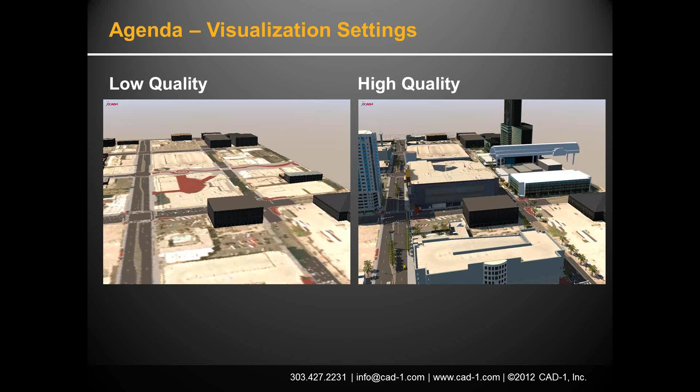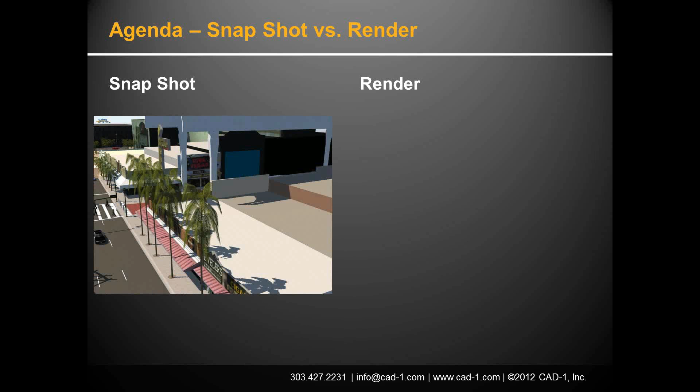When you're taking pictures, you can either do a snapshot or a render. A snapshot is basically a screen capture of what the screen looks like, so you go in there and take a snapshot and get pretty much exactly what's on the screen. A render will actually go in there and render the scene. If you look at the shadows of the palm trees, the palm trees themselves, or the road, you can see the materials in more detail. So you can go in and render the scene.

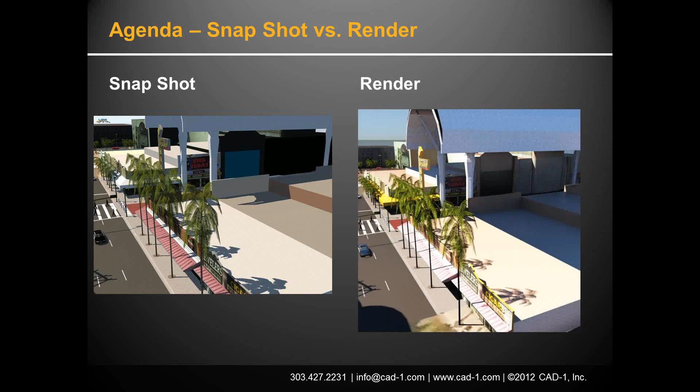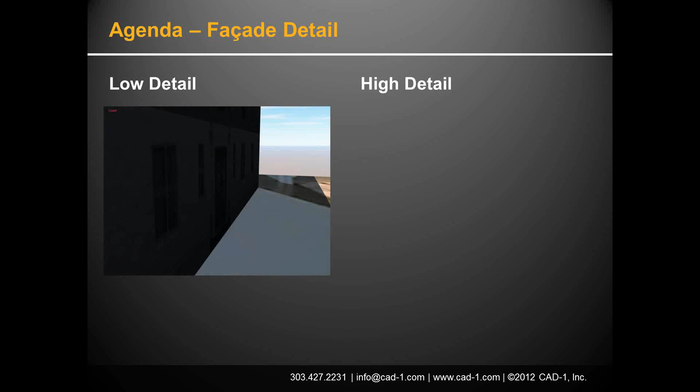All right, you've got the facades. The buildings have a facade, and you can change the details of those as well. So we've got, again, a low detail and a high detail on the facade. This is going to be the exact same picture. Over here on the left, the detail is set to low - you know, I want to be able to move around quick, I don't want to take those resources to calculate all the different parts of the facade. Over here on the right is the exact same facade with the detail set to high. So you can see there's a huge difference.

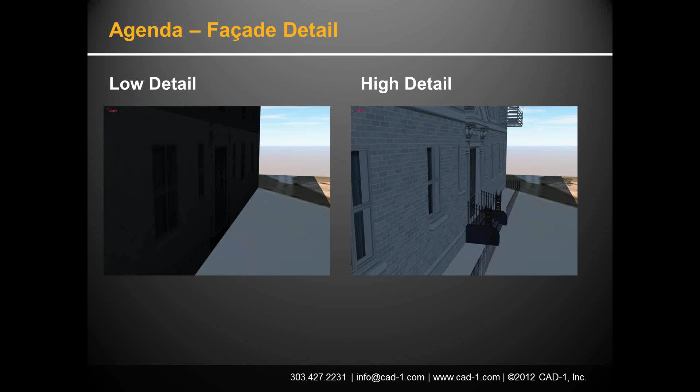I just want to see a picture of the side of it, or I actually want to see it as a 3D model - I want to see the steps, I want to see the fire escape. If you look in the shadow over there on the far right-hand side, you can actually see the shadow of the fire escape on the ground.

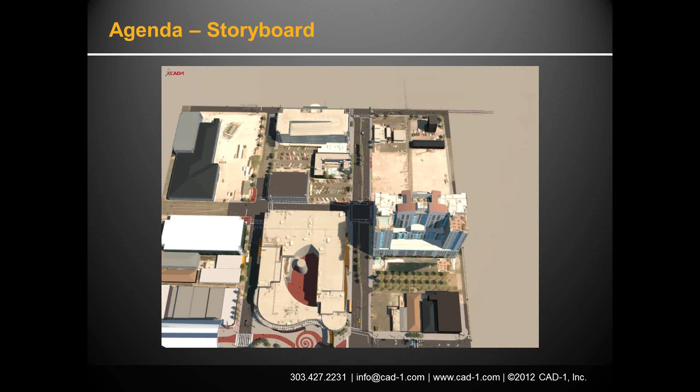And then we can also get in and start doing some animations or some visualizations with the storyboards, so you can go in and create videos. Now, I'm not the best - I'm an engineer, so I don't have a real good eye for visualization and what makes a video look good. But this is an example of the tools. It's going through the web interface, so it's not quite as smooth as what I'm seeing on my system, but it gives you an idea of what you can do with the visualization tools.

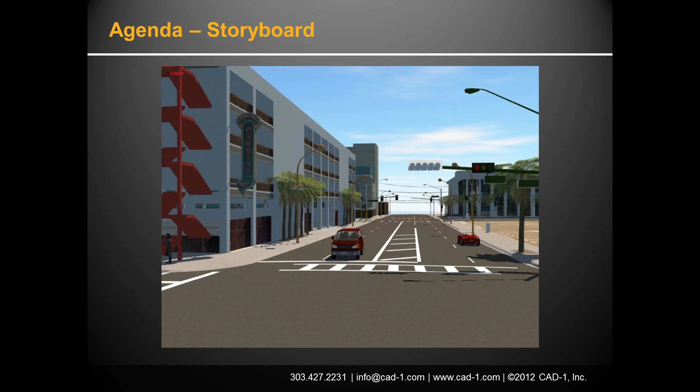All right, so we can see how to create a video, something along these lines. I know I've got a great idea. Let's just get to it, shall we?

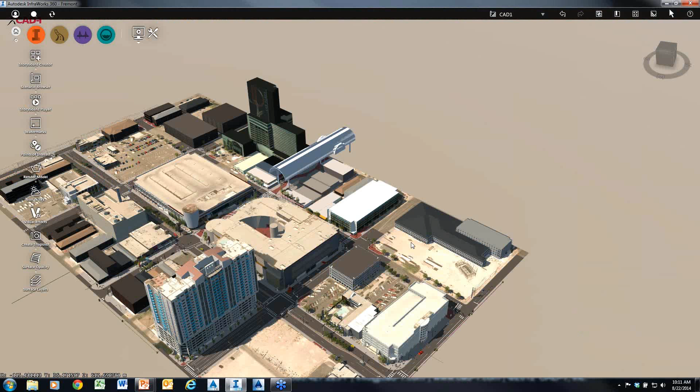I'm going to open up Infraworks here. This is a sample model that comes with the program. If you've got Infraworks 360, you can download this. This is Fremont Street in Vegas, and this is the one I'll be using to demonstrate some of these different settings.

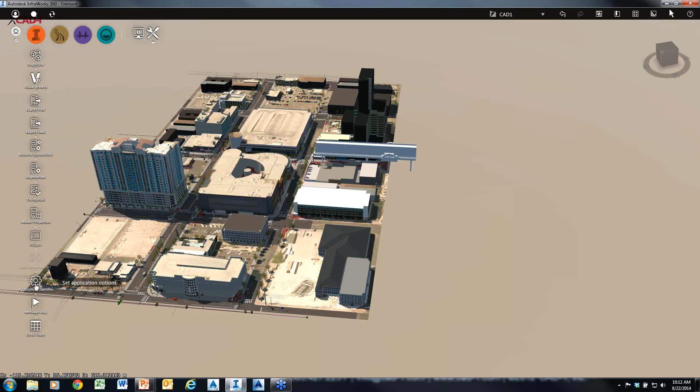In Infraworks, I can come into my visualization settings. Under my settings and utilities, I have my application options, down here in the far left. It just opens up, and this is where I can go in and set those different settings.

Now, these settings are not for the model, they're for the application. So, for example, underneath my 3D graphics, you can see right now this is optimized for quality, so I see everything in high detail. If I change this to optimized for speed, it's just a little pull-down here, you've got two options.

These are just basically presets of these settings down here. I'm going to set this to optimize for speed, and you can see in my model quite a bit of detail disappears. Now as I pan and zoom around, that detail comes back up depending upon the distance I am and how complex things are.

All right, so this is with the quality setting to low. There's a question: what is the 10-bit color? This is under the 3D graphics, use 10-bit color channels.

This is more colors than you'll get with what we get now. From what I understand, I don't know a whole lot about it, but it gives you a whole bunch of extra colors that most monitors can't handle. So you have to have something that can actually display 10-bit color.

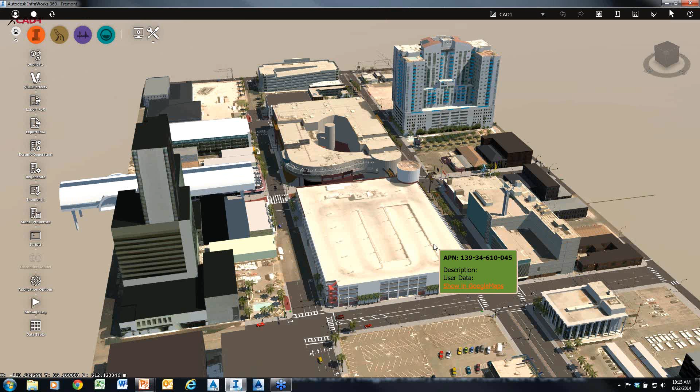And I get to see some nice detail. I get some really cool looking palm trees here, and I see cars and all sorts of fun detail.

All right, so back there in the settings, let's talk about some of these. We've got the display detail, so this is just a slider. Right now you can see this is set to optimize for quality. So as I make changes down here, I'm changing the presets for optimized for quality.

So if I lower my detail, you can see things start to disappear. As I bump this back up, things start to appear again.

Anti-aliasing, not exactly sure what this is, but it's more of a visual style, jagged lines type thing. So if you have, say for example, a roof line here, is that going to show up as a smooth line, or is it? I'm sure most people here worked in AutoCAD, and you see when you draw that line, you get kind of the little stair-step lines when it's close to being horizontal or vertical. This is what anti-aliasing takes into account.

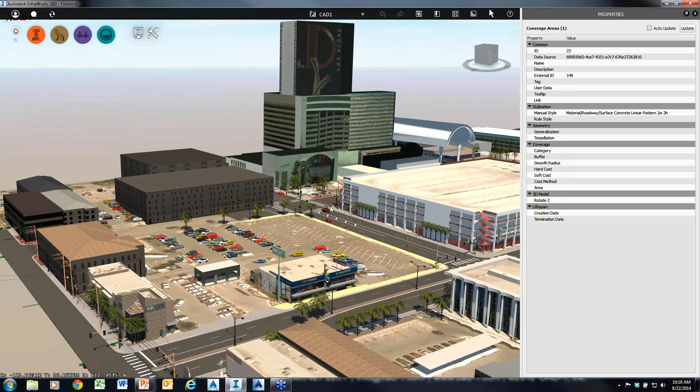All right, so let's take a look now at the building facades. I've got a nice little bookmark here for my facade detail. Let's see if we can find one that has a little bit of light on it. There we go.

All right, so as you can see we got these really cool looking fire escapes on the side of this building. So what I can do is I can go back into my settings, my application options again, and under my model generation I have an option for the building facade detail.

Right now it's set to high. If I set this to medium, nothing changed. After you make a change to the facade detail, if you want to see what it's going to look like, what I found that seems to work best is go into the properties of the building and make a change to it - make it change to something. So for example, I'll put in a description here of hello, and then I'll update it, and then you can see the change in the model there.

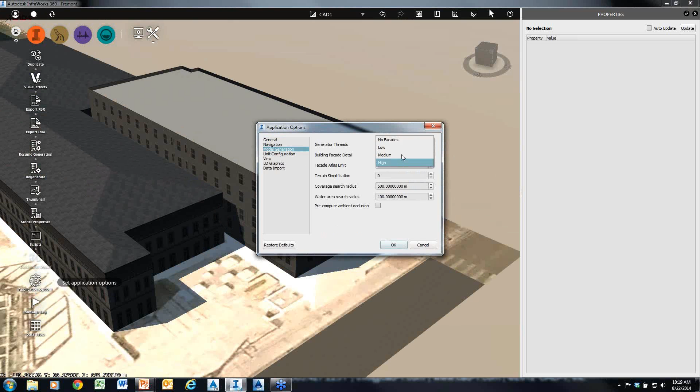So the detail is now set to medium. When it's set to medium, as I zoom out it takes quite a while before I lose that detail on the facade. If I go back in here and set that model generation to low, let me go ahead and change something - hello again - and I'll update that. You can see we had the little ledge on the top of the roof.

What's that called, Brian? Parapet. That little parapet on the top of the roof, it disappeared. So it gives me even less detail.

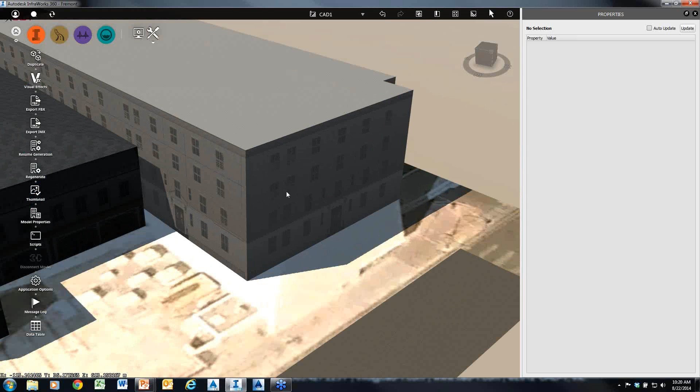And then if I want to, I can go ahead and turn off the facade altogether. Let me go ahead and update this, and I'll just change that back to hello and update it. And you can see now the facades have no details on them at all.

Obviously, the less information you show, the better your performance will be while working in the building or working in the model. You'll be able to navigate much faster, things will generate much faster. You just won't have the detail.

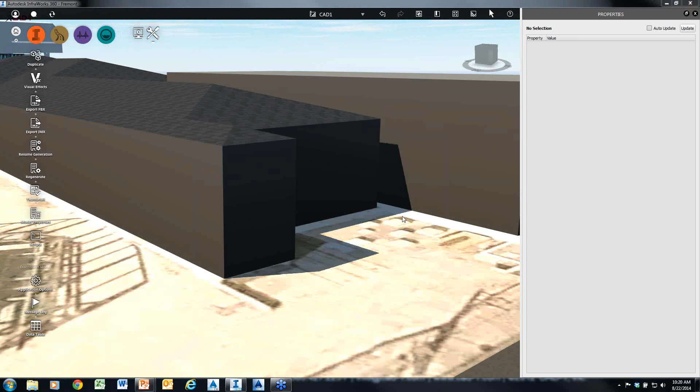All right, so those are some of the settings. Let's check out some of the other settings here. Under the 3D graphics, you've got options down here.

You can turn on your water reflections. I don't have any water in this particular model, so if you want to see the buildings reflecting in the water, the realistic water, you have the motion in the water. You can also turn shadows on and off.

So we've got shadows in here - you can actually see the shadows from these poles here. If I turn the shadows off, you see the shadows all go away. Again, it's going to make your model much faster. Turn the shadows back on, and things look much better.

And then you get this option down here to show back faces. I see this be an issue quite often, especially when people are dealing with SketchUp models or 3D models that they bring into their file. Your different faces, especially in a SketchUp model, you have the front face and you'll have the back face.

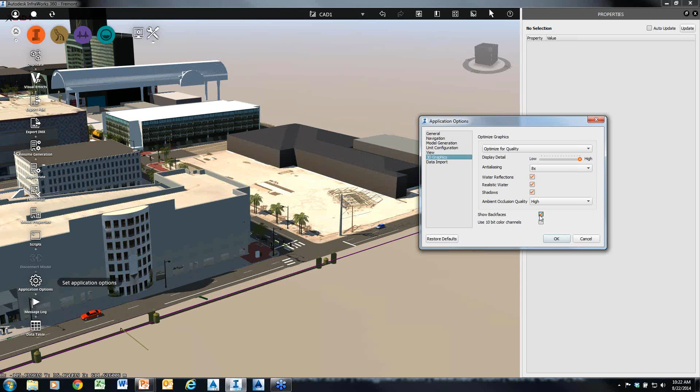Let me bring a model in here real quick that I've got, or at least I think I've got. All right, so I'm just going to go bring in a model. Let's see, I have to save that to... let's see where's that sample. There it is. All right, so I'm going to bring Coors Field in here just because I feel like it. We'll see how it compares in size.

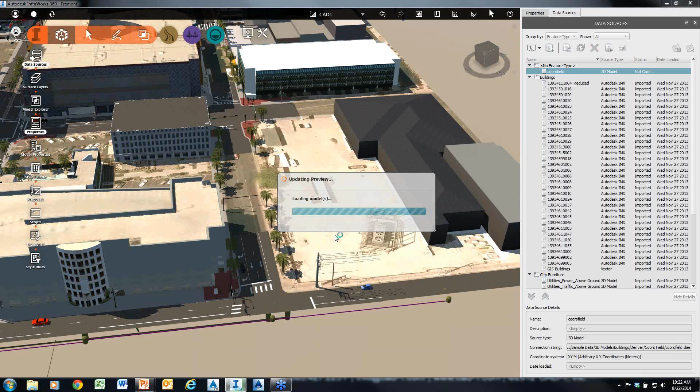And the reason I'm bringing this one in is because I'm pretty sure it has that back faces issue.

All right, where'd it go? Oh, it helps if I actually give it a type here. So I'll make that city furniture. I always forget something at the spur of the moment.

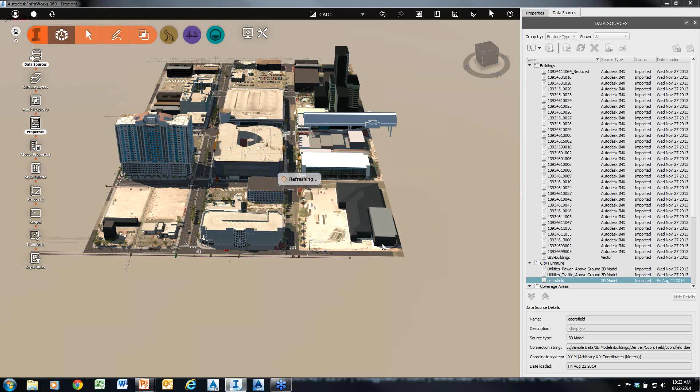All right, it's thinking. Give me just a moment here. Maybe later.

All right, so here's my Coors Field. I eventually am going to get rid of this, but as you can see, if you take a look at the lights up here at the top, they look fine. There don't seem to be much issues with those.

If I go back into my application settings and I turn off show back faces... this isn't the model that was doing that. Oh, bummer.

Okay, so if I look underneath of the model, you can see I can see right through a lot of the model. So this one actually does have the back face issue. It's just not as bad as the other models that I've been using. So as you can see, I can see right through the bottom of the surface as well. So the faces have both sides.

If you're looking at it from one side and you can't see the thing that you should be able to see, turn on your back faces. So if I go back and I go to my 3D graphics and I show back faces, you can see I can now see the underside of it.

Again, this is here to help with performance. If you're just working a basic, real simple Infraworks model, you don't really need to show the back faces. But if you're trying to, say, show utilities, let me get rid of the Coors Field here, and I'm zoomed in underneath the street, showing the back faces can be really helpful in seeing where in relationship to the roads and the surface and everything these utilities are.

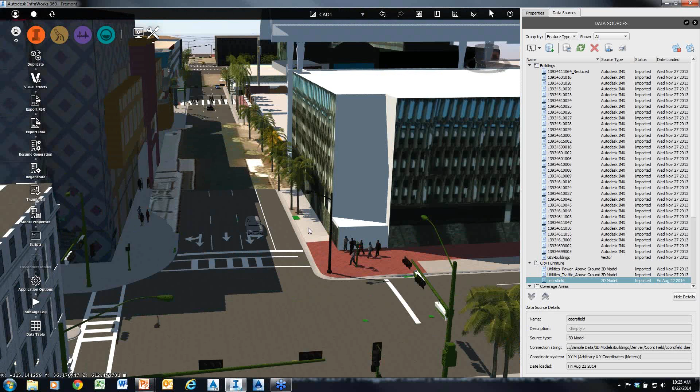All right. So let's talk a little bit about just taking images. So under my presentations menu here, create and conduct infrastructure design presentations. It's got the little monitor with the play symbol on it.

What I'm going to do real quick, let's zoom in here where we got some cool trees. And we got trader bills and a cop car and some fun stuff going on here. All right, so I want to take an image of this spot right now.

So under my presentations menu, I get the command create a snapshot. So I'll create my snapshot. It's going to ask, okay, where do you want to save this? All right, so I'm just saying, let's see, I'll go to my documents and I'll create a new folder here called Infraworks Images. Oops, I misspelled it, but that's okay. And I'll call this one Snapshot.

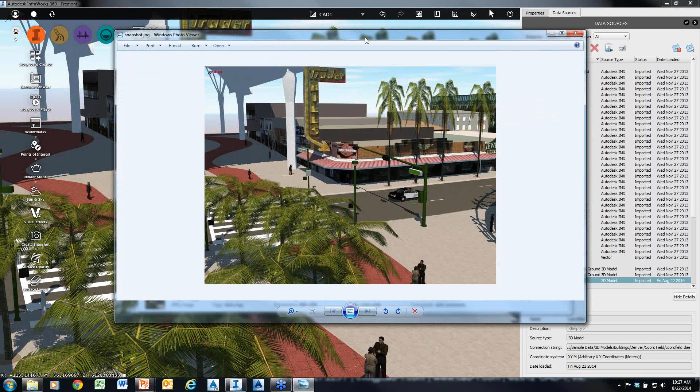That works. All right, and I'll save this. I can set the resolution. I can use the resolution of the viewport. I'm going to do it 800 by 600. I'll save that. And now if I go open that, you can see it's just a picture. It almost looks exactly like what I have here in Infraworks.

All right, it's same quality. It's just basically a screenshot. All right, the other option I have is to render this model. So I've got this option here, render model. All right. So what's going to happen as you run the command, it's going to continue to render the scene.

Until you get to a point where you're happy with it. So you just take a look at the preview over there on the right-hand side, and as you watch, it'll constantly be updating and getting better. And once you get it to a point where, hey, I like this, you just hit the stop button down here, this little red button, and then you hit the save button.

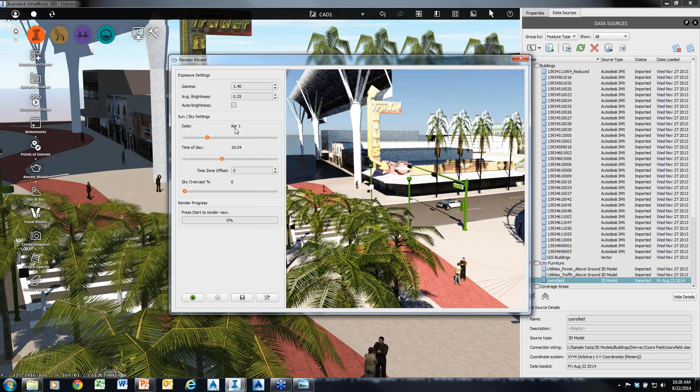Now, before you get too far into it, you might want to just go ahead and stop it and then change some of the settings. Like, for example, I can change the date for the sun. So right now it's April 1st at 10:30 in the morning. Well, maybe I want to know what it's like on June 18th at 7:30 in the morning.

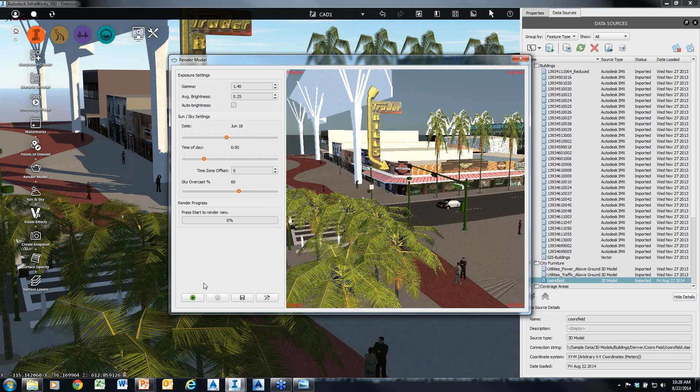And you can see my model in the background here starting to change. I can change how much overcast it is. So this will affect the light in the rendered scene. So if I change this, say, to 60% overcast, and then I'll just start rendering it again. So I got some more controls over the rendering than I do over the snapshot.

And again, as this progresses, it'll continue to get better and better. How long should you let it run? I don't know, as long as you want, until it gets to the point where you like it. So you can see each time it gets through that pass, it gets a little bit better, and a little bit better, and a little bit better.

And then when I'm done, I just hit stop, and then I save it. I'll just call this one render.jpg. All right, so there's the rendered scene, and it would continue to get better if I let it run further. And there's the snapshot. So the render versus the snapshot.

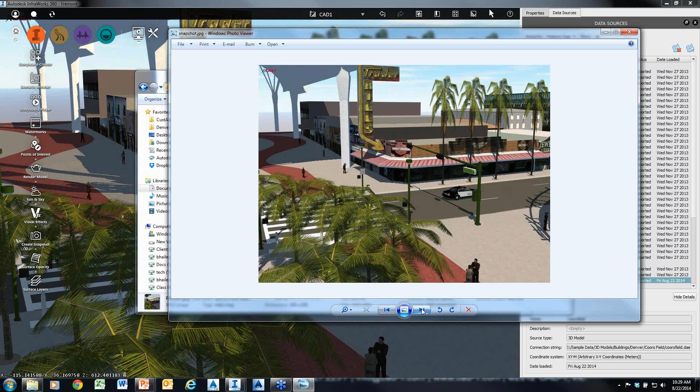All right, so does anybody have any questions so far on any of these things that we've done? If you do, go ahead and type them in.

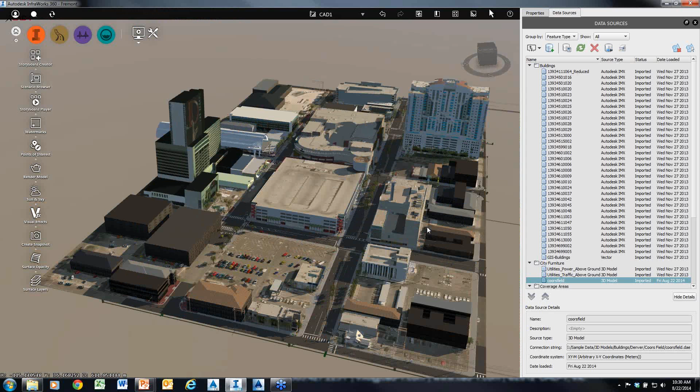All right, next thing I want to do is I want to make a video. I want to create a fly-through of my project. So this is going to be done through the presentation menu, and I'm going to create a storyboard. So I come over here to the storyboard creator.

All right, so Julia has a question. Will the render ever get better than the snapshot? A lot of it depends upon the settings, your computer, or how long you let it run, and what you consider to be better. The snapshot is just what you see on the screen. A render, or the water looks, if I had water in here, you would see the water looks much more realistic than the kind of cartoony water that Infraworks has, just kind of in general. So, like I said, a lot of it depends on your settings. If you know how the settings affect rendering, you can get a really good scene out of it.

I'm a civil engineer. I don't know how to make things look good. But we do have people in the office that do. So if you have questions on those types of settings, we have people that can help you with that.

So I've got my storyboards open. I went ahead and created a video. This is the video that I created for the PowerPoint presentation. So what I can do is I can just come in here and play the video. Again, it looks much better on my screen than through the web interface just because there's a lot of graphics that have to be pushed through the internet right now for this.

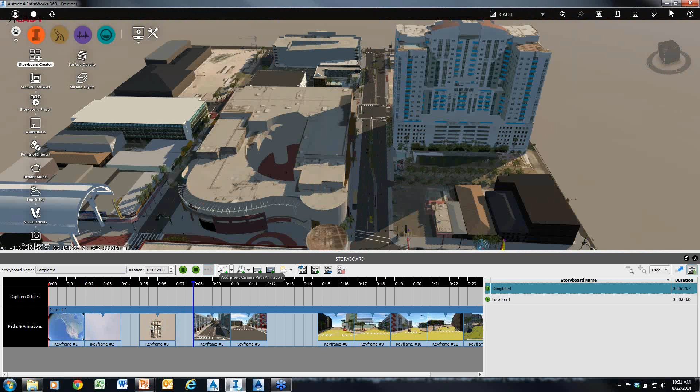On your screen, it's very choppy. On my screen, it's very smooth. All right, so how do we go about creating these sorts of things? Well, let me go ahead and stop this. We're done now.

Basically, what I'm going to do is I'm going to go create a new storyboard. So I come down here, and I'm going to add in a storyboard. All right, so I'll add in a new storyboard. I'm going to name this storyboard webinar. Why not, right? And then basically I zoom to the area where I want to start. So I want to start my presentation, say for example here. I'm then going to come down and I'm going to add a camera path animation.

This is probably the simplest way of creating these animations. There are lots of different ways of creating specific pans and zooms and cranes and things like that. If you want to get into that, you absolutely can. But I'm just going to use the camera path animation.

There are a couple other options down here. You can create an animation from a design road. So if you have Infraworks 360 with the roadway design tools, you can create a design road and then have an animation that will follow along the design road.

And you can also import a camera path. So I did a little bit of testing with this, and you can actually go into Civil 3D, create points, export those to a point file, and import that as a camera path, and then you can real easily create your camera path that way. But in this case, I'm just going to add a camera path animation.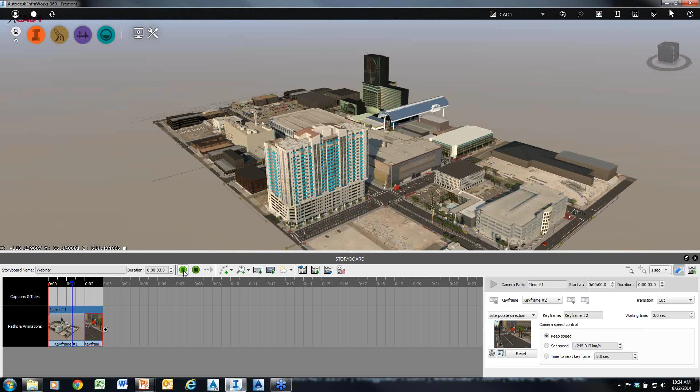All I have to do is hit the plus down here, and this will add the current view as the next keyframe. So when I come over here and play the animation, it's going to take 3 seconds to get there. And like I said, on my screen it's much smoother than what you guys are seeing.

Now I'm here, again I've got settings. By default it's set to keep the speed. So if I've zoomed from far out to way in over 3 seconds, well, I was moving at about 1,200 kilometers per hour. I don't want to be moving that fast down this road. So I'm going to set the speed—say the speed limit here is probably 30 miles an hour—so I'll say 100 kilometers per hour, faster than somebody would normally drive.

And then I just go to the next spot where I want my next keyframe. Let's pan over this way a little bit, and get away from the light. There we go, ah, that looks good. And then again I hit the plus to add in the keyframe.

So this is going to take 7 seconds to go down this road. If I come back up here, I'll just start at the beginning and hit play. So it's going to take 3 seconds to get to that first spot. And then, I didn't do a very good job with that—I should come back and fix that so I don't dip under the ground. Then 7 seconds to get to the next one. So it kind of tries to keep the same path going.

And then maybe I want to look around, so I'll come up here, let's take a look down this road here, and I want to see the bridge and Fremont Street. And then again I simply come in here and add the next keyframe. Alright, and then I hit play, and I can see the whole thing once again.